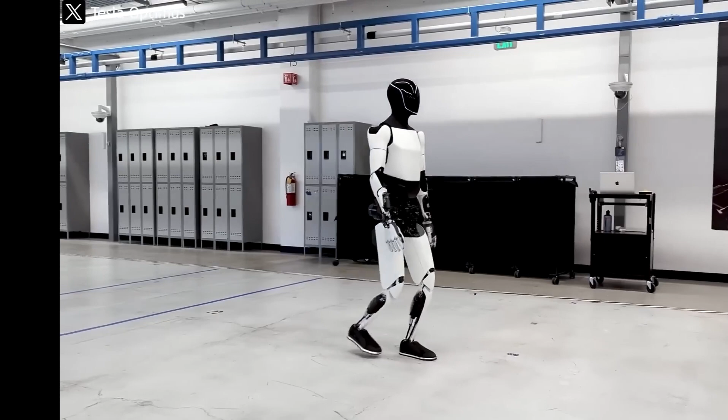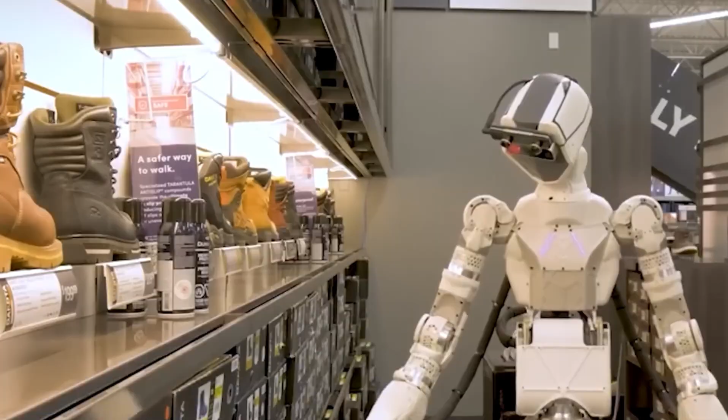This is a super big deal. My prediction is that Optimus will be the biggest product of all time by far. Nothing will even be close. I think it'll be 10 times bigger than the next biggest product ever made.

Your companion, it can be at your house. It can sort of babysit your kids. It could teach them. It'll be a teacher.

When people hear humanoid robot, a lot of us, including yours truly, imagine a bright futuristic world where robots handle all the tough, dangerous, or just plain boring tasks we don't want to deal with. Who hasn't daydreamed about having a robot that cooks, does the dishes, and takes care of chores? Sounds like a dream, right?

But at the same time, plenty of people are freaking out, worrying that these machines will steal human jobs, or worse, take over the world and turn us into their servants, just like in every sci-fi movie we've ever watched.

And then there's the rest of us who think humanoid robots are just clunky, slow, and borderline ridiculous. Basically, a pile of overpriced scrap metal struggling to walk straight. People joke about them walking like Biden or a drunk guy trying to find his way home. Honestly, that's not entirely wrong.

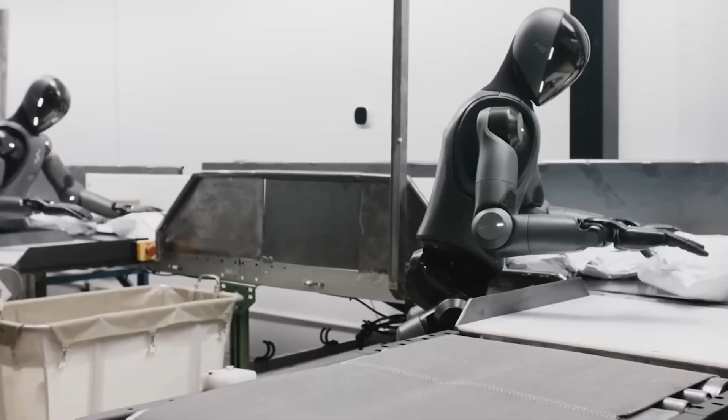Most humanoid robots today still struggle to prove they're actually useful in real life. In fact, some of them look so awkward that it's hard not to be a little skeptical.

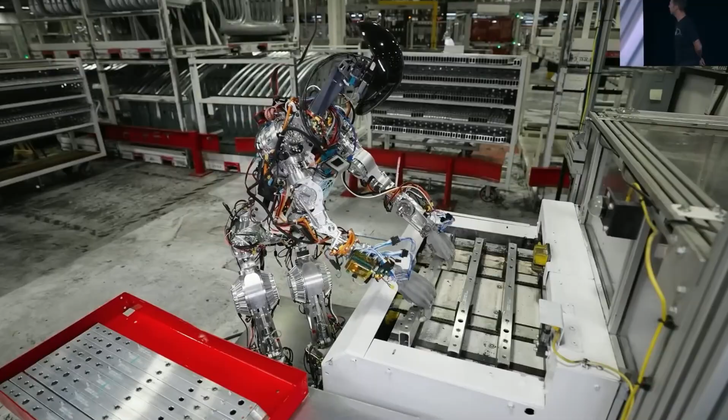But have you noticed something? Over the past 2 years, things have changed big time. More than just small improvements. We're talking next-level advancements. 2 years ago, it was pretty much just Tesla Bot and Boston Dynamics Atlas battling it out. But now, we're convinced this isn't just a two-horse race anymore. It's turned into an all-out tech war with dozens of heavy hitters from North America to China jumping in.

To be fair, we're not here to say that Tesla has the best or most advanced robot out there. But what we do believe is that Tesla Optimus has the most potential when it comes to actually making a difference in people's lives. At the same time, it's also one of the most accessible humanoid robots out there, priced competitively enough to make owning one a real possibility for more people than ever before.

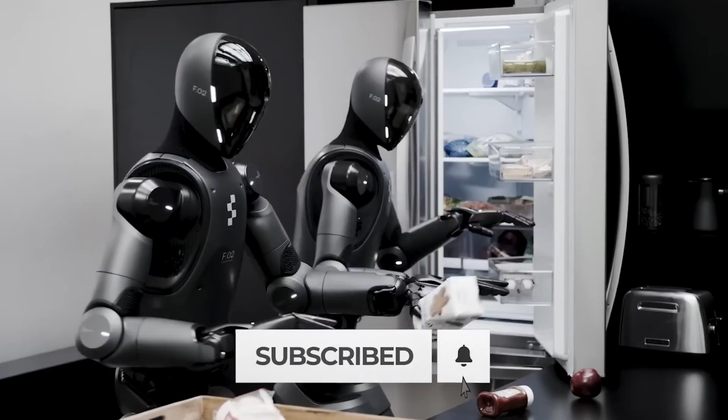You also need to be very good at scale manufacturing. So, in order to have the robot not cost like hundreds of thousands of dollars, in order to make it cost like $20,000 or $30,000, you should be able to buy an Optimus robot for, I think, probably $20,000 to $30,000 long term.

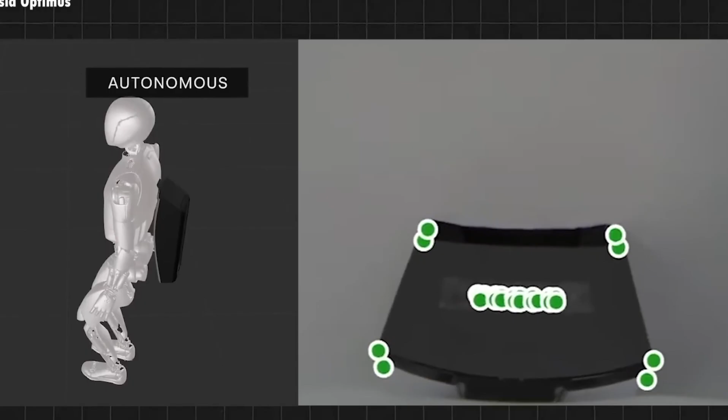Most humanoid robots today still struggle to fit into the real world, mainly because they're not mass-produced. We often see sensational news about a new robot from some company impressing us with amazing tasks and moves. But then after a while, these robots just fade away as if they never existed. This is the common reality of humanoid robotics, and it's why many people believe they're just fancy prototypes in labs that will never make it into real life.

However, Tesla changed the game completely. Not only are they mass-producing humanoid robots, but they also brought 50 Optimus bots to a major event where attendees could actually see and interact with them in person.

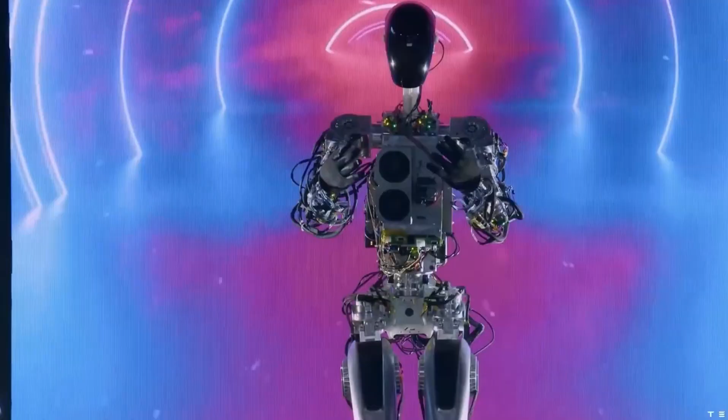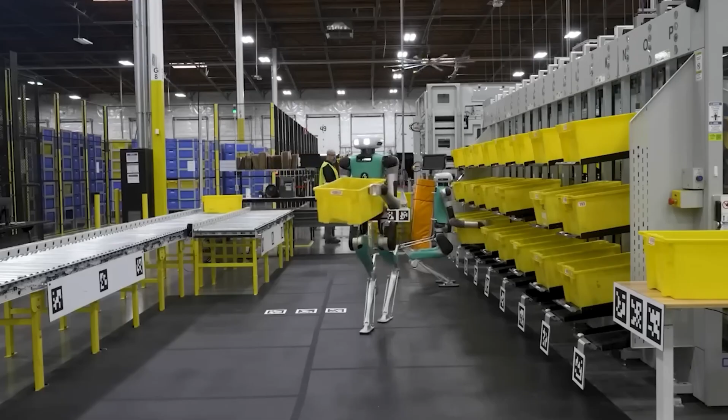The funny part, the event was originally meant to launch Cybercab, Tesla's new fully autonomous robo-taxi. But guess what? The spotlight was stolen by the robots. People gathered around Optimus, not the car, showing that Tesla bot is not just another hype. It's breaking the stereotype that humanoid robots are useless or boring.

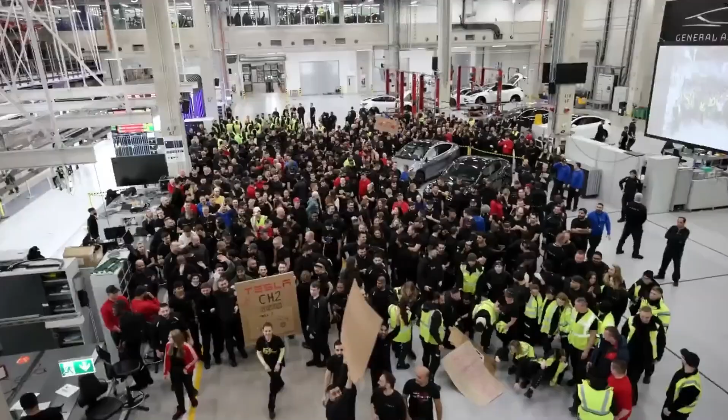And Optimus, it's already proving it can handle a bunch of tasks you'd actually want help with. Yeah, it can receive and inspect packages, serve drinks, fold clothes, charge your EV, clean the kitchen, water your plants, carry heavy stuff, play games with your family, dance, and even answer all your questions.

And here's the kicker. Tesla did all this in less than 2 years. Their progress is so impressive that even Boston Dynamics, one of their biggest competitors, had to give them props. The Tesla team is making great progress, and in 1 year building a couple of machines from scratch, that's remarkable. They're shining a spotlight on the importance of this technology, which we've been arguing for 30 years. So, I think that only helps us.

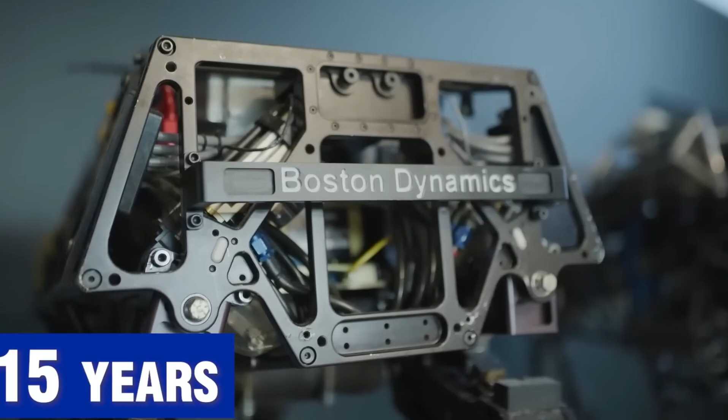What do you think about a robot capable of handling multiple tasks continuously for 8 to 10 hours? And you don't even have to worry about charging it because it can recharge itself. Sounds crazy, right? But that's exactly what the Tesla bot offers. With Tesla's cutting-edge 4680 battery pack combined with an optimally sized battery for a humanoid robot, this is something you won't find in any other humanoid robot in the world.

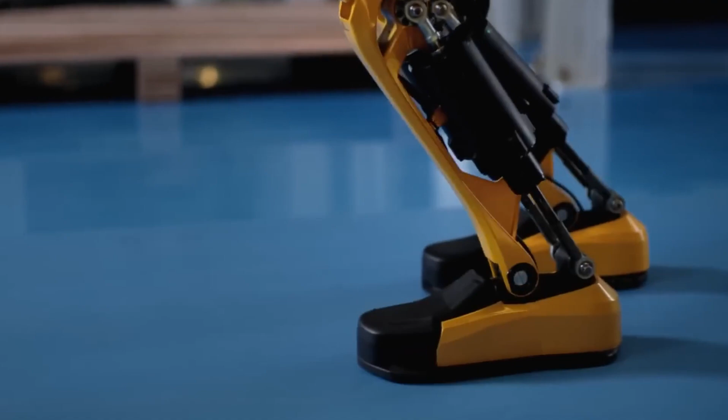This unique feature has garnered significant attention for Optimus and has people eagerly awaiting its release. Imagine putting it to work in a restaurant with 8 to 10 hours of continuous operation. The potential profits could reach tens of thousands of dollars per year compared to your initial investment.

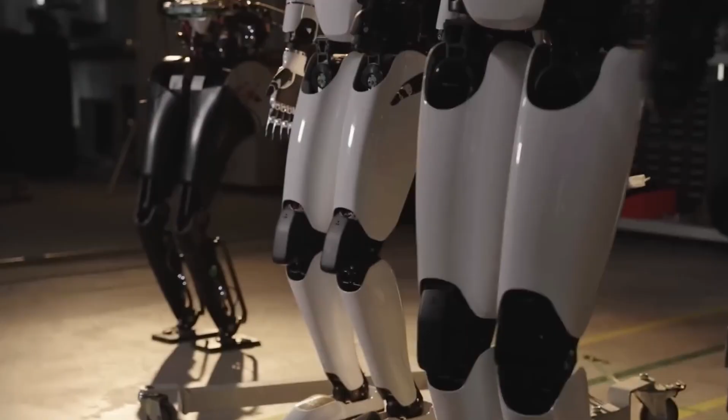You can imagine your own personal robot buddy that is a great friend but also takes care of your house. We'll clean your house. We'll mow the lawn. We'll walk the dog. And we'll teach your kids. We'll babysit. And will also enable the production of goods and services.

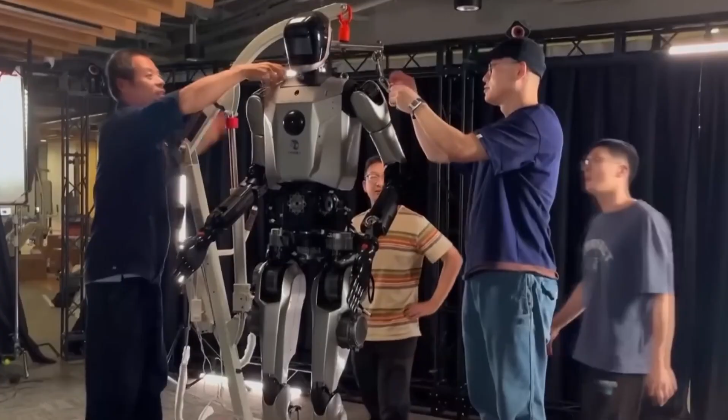In 2022, Tesla first introduced Optimus with a 2.3 kilowatt-hour battery. But at the time the prototype mainly used standard 2170 battery cells, as the 4680 battery technology was not yet available. As a result, Optimus had a rather bulky and rudimentary design.

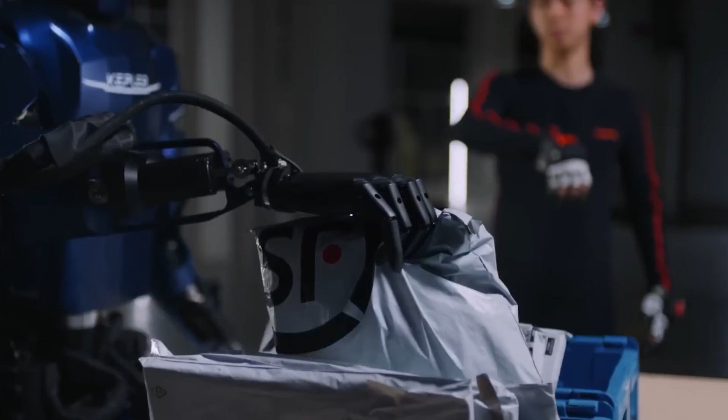However, Tesla has since confirmed that Optimus has been integrated with the company's most advanced 4680 battery technology. Although detailed specifications have not been disclosed, the 4680 battery offers many significant advantages, with a higher energy density that's 5 times greater than the 2170 cells, providing more energy per unit volume while reducing production costs by approximately 14% thanks to improvements in design and manufacturing processes. These benefits have made a major leap in optimizing energy and efficiency.

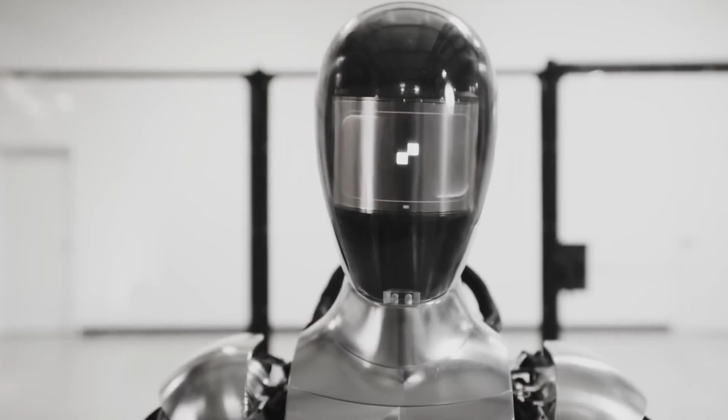When integrating the 4680 battery into the Tesla Bot, Optimus's design became more compact, eliminating the need for a large and bulky battery pack. This not only improved performance but also significantly reduced the robot's weight. For example, the second-generation Optimus shed 22 pounds, dropping from 160 pounds in the first generation to 138 pounds.

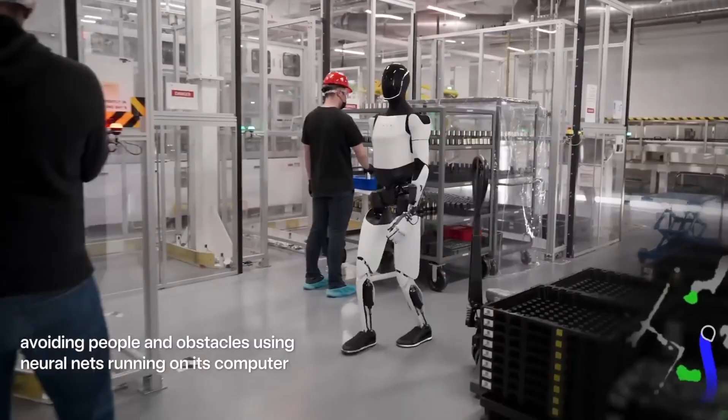Thanks to the superior energy density of the 4680 battery, it not only reduces the size of the battery pack, but also provides enough power for Optimus to operate continuously for 8 to 10 hours. Compared to the first-generation version with a 2.3 kilowatt-hour battery, the second-generation Optimus uses a slightly larger 4680 battery pack, reaching up to 3 kilowatt-hours.

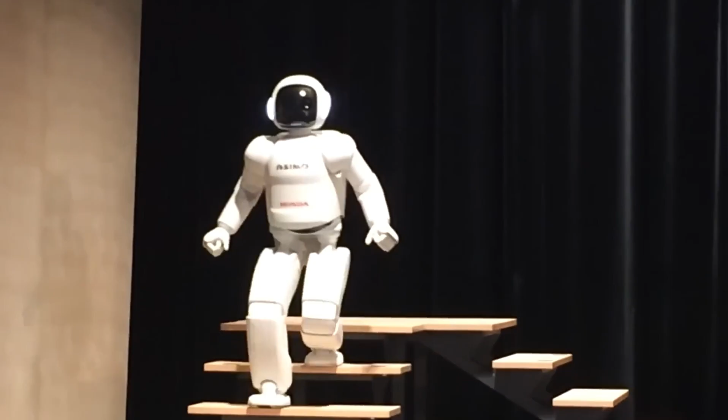What's truly surprising is the recent update about how Optimus charges. Until now, we've all assumed that charging Optimus is like charging an electric vehicle, where you have to plug it in manually. But it turns out it's far smarter than we thought. It's hard to believe that Tesla Optimus can charge itself without the need for user intervention.

Similar to the Cybercab, which automatically returns to a parking area equipped with a wireless charging pad where it charges autonomously, Optimus, as shown in the video, can autonomously locate, navigate, and connect to a wall-mounted charger with an extended connector. This is a charging port that Optimus aligns and connects to by itself. Once the battery is fully charged, it automatically disconnects and resumes its tasks.

If Optimus is charged using wireless charging with a battery pack just under 3 kilowatt-hours, it will charge much faster compared to electric vehicles, which typically take 30 to 40 minutes to fully charge. We believe 10 minutes would be enough to fully recharge Optimus.

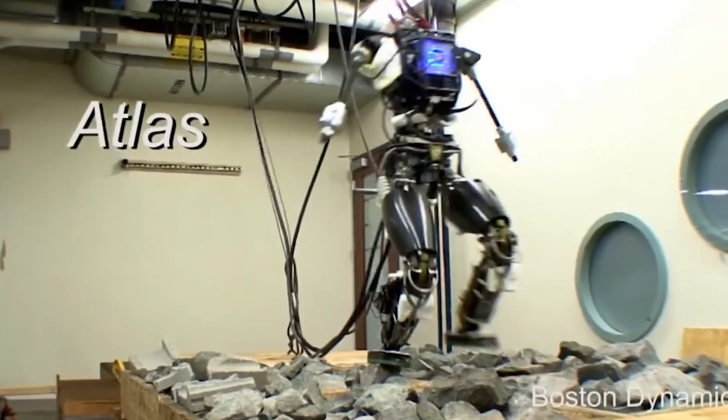This is exactly why no competitor can match Tesla, a fully autonomous robot, for every task.

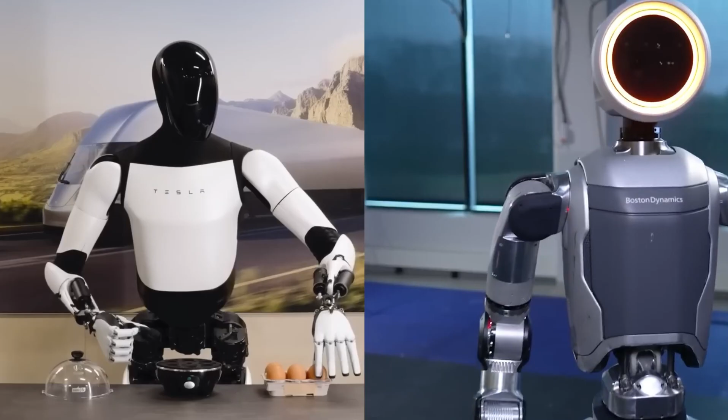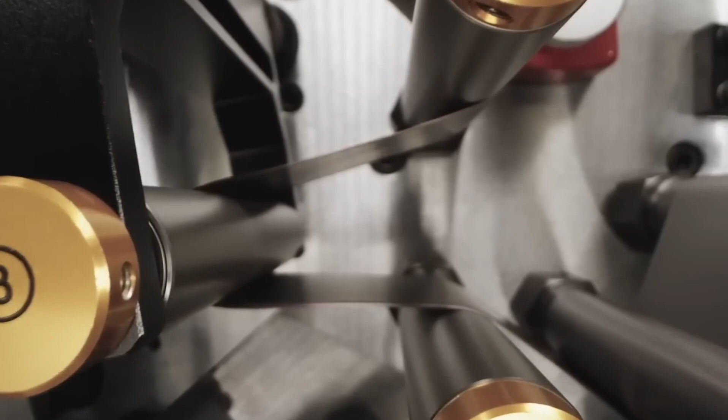Tesla is aiming to make Optimus more accessible to more people at a price of just $20,000. This is a bold but calculated business strategy, thanks to the large scale of production and the in-house manufacturing of Optimus components, including the 4680 battery.

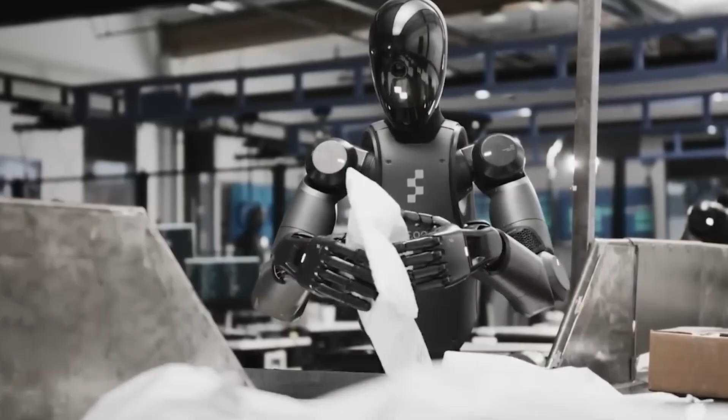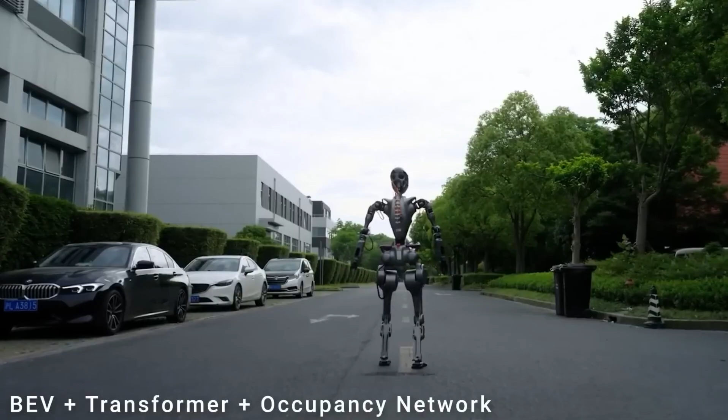Elon Musk has said that Tesla only incurs production costs of around $10,000 per Optimus unit, largely due to the use of components common to Tesla electric vehicles. As a result, the $20,000 price tag is not only feasible, but also reasonable, especially since Tesla is less dependent on outside suppliers. The 4680 battery is a big part of achieving this goal, keeping production costs low while maintaining high performance.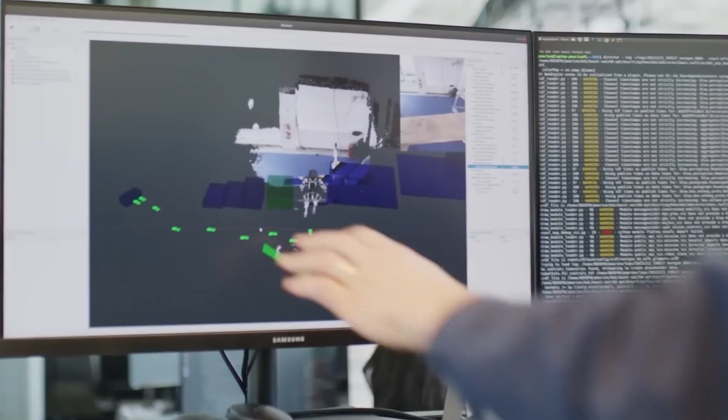In fact, for $20,000, you will be hard-pressed to find a humanoid robot as advanced as the Tesla Bot. This makes Optimus more accessible to a wider range of customers, opening up robot ownership to millions of people around the globe.

It can watch a video of something like a person and then learn just by looking at that video and do that task.

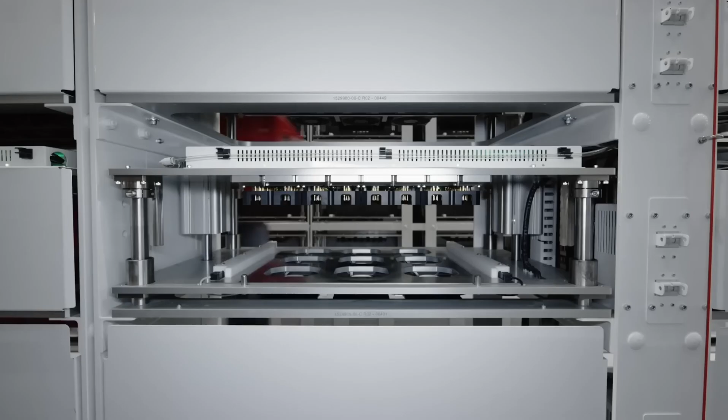Oh my god, we've seriously imagined all sorts of scenarios. If Optimus could actually understand human emotions, just picture this: you point at the fridge and it immediately brings you a beer, or if you rub your stomach, it knows you're hungry. Even crazier, if you act tired, it'll automatically come over and give you a massage. How amazing would that be, right?

Elon Musk emphasized that Optimus is smart enough to perform tasks just by watching a video without needing direct programming. So what if you show it a cooking video, or a piano performance, maybe even a magic trick? Yeah, it could learn from that.

Of course, it might be a bit clumsy at first because it needs to repeat those actions a few times to gather enough data, but this is a perfect example of AI learning, specifically using a deep learning approach. It'll probably have a few bugs, but it's going to be very cool. You'll want to invite your friends over and say, check this out.

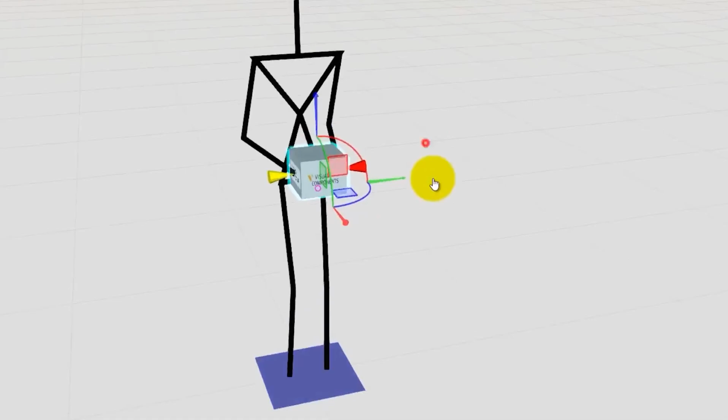Of course, it's going to be tough for a new product like Optimus to be perfect right from the start, especially with a product that requires real-world user experiences. That's why Elon Musk has openly admitted that Optimus will have a few bugs. So what kind of issues could arise?

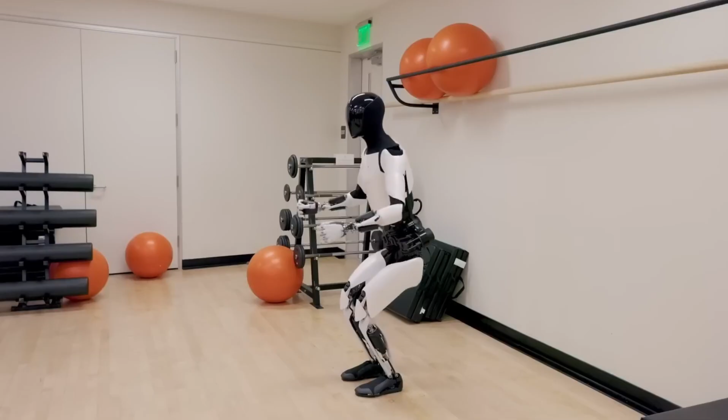One potential problem is misunderstanding commands. The robot might not always recognize natural human speech correctly. Imagine you ask it to grab food and it brings you an empty plate instead. Since Optimus relies on an internet connection, disruptions or connectivity issues are another potential problem.

If the connection fails, the robot might not be able to access its system's data, which could cause it to malfunction. Additionally, stairs could be tricky for Optimus. While it can go up and down stairs, this remains a huge challenge. It requires precise calculation and perfect balance with each step. Otherwise, the robot could trip or fall. So it's definitely a work in progress.

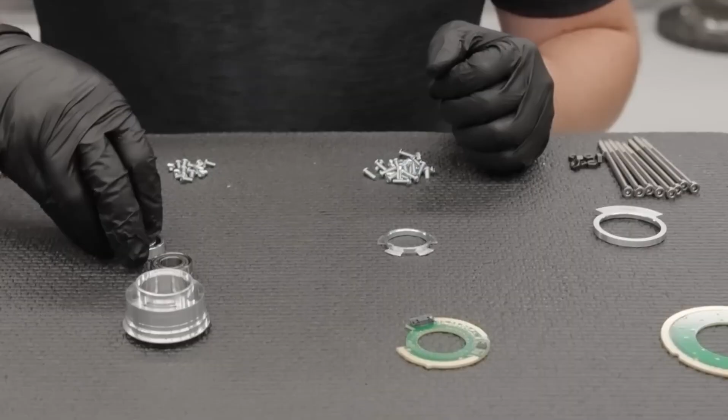All these bugs are expected to improve over time thanks to software updates and ongoing technical enhancements. Elon Musk has emphasized that Optimus will even have the ability to self-correct while it's operating. A perfect example of this is when the Tesla bot dropped a battery cell from its tray. It immediately reorganized everything without human intervention.

So this year we hopefully will be able to make about 5,000 Optimus robots. We're aiming for enough parts to make 10,000, maybe 12,000. But since it's a totally new product with totally new, like everything is totally new, I'll say we're succeeding if we get to half of the 10,000.

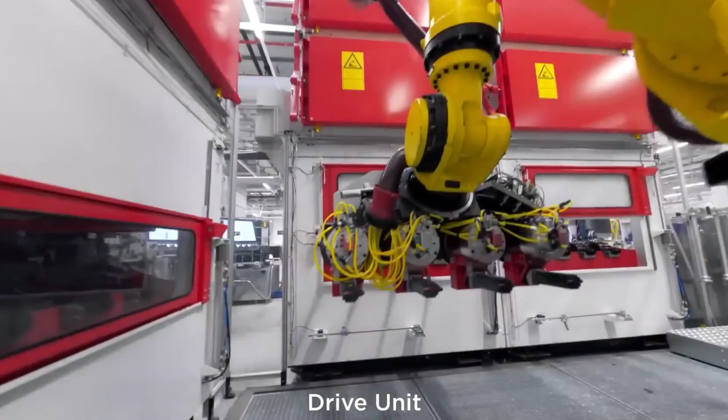Now, but even 5,000 robots, that's the size of a Roman legion, FYI, which is like a little scary thought, like a whole legion of robots. I'd be like, whoa, okay. But I think we will literally build a legion, at least one legion of robots this year. And then probably 10 legions next year. And I don't know, it's kind of a cool unit.

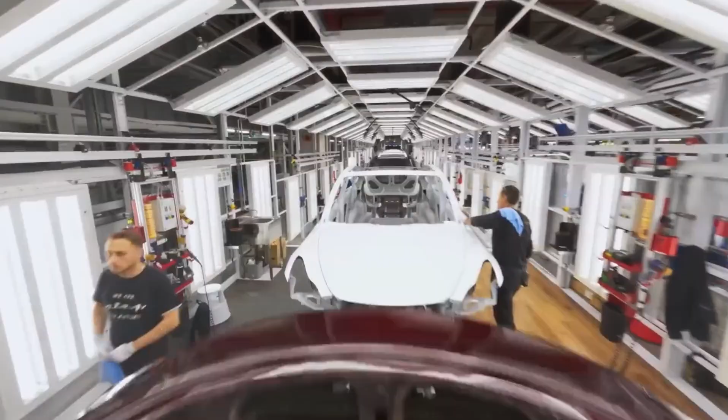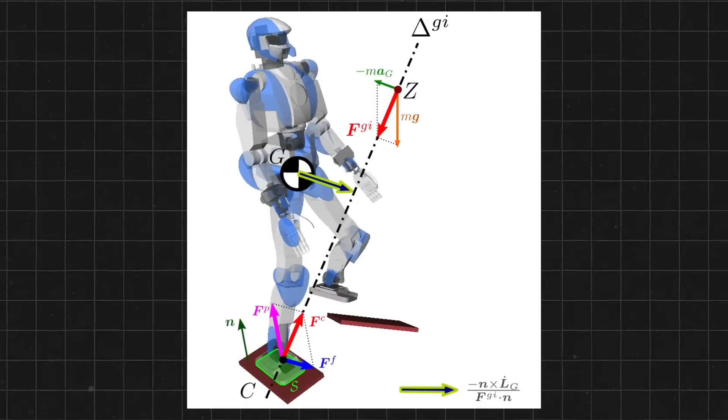We are very excited and confident that this will happen sooner than expected based on Tesla's current pace. Musk mentioned that they are in the process of redesigning Optimus. He admitted on X last year that reworking Optimus' design was one of the most challenging parts of the process, but it was necessary to achieve a design suitable for mass production. From what we know, this new design will belong to the Gen 3, a special version.

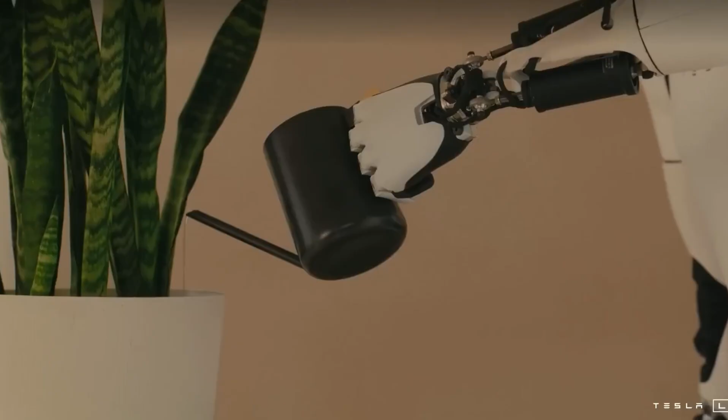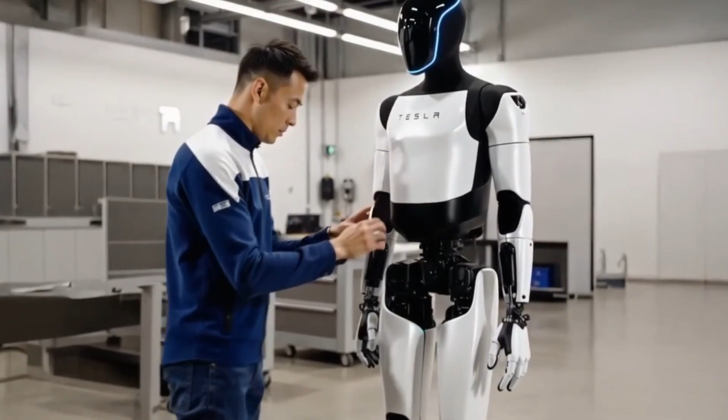As mentioned earlier, around 5,000 to 10,000 Optimus units are expected to be produced this year. The fact is Tesla cannot accelerate the production of Optimus as quickly as electric vehicles in the initial phase because they lack experience with a dedicated production line, a topic we often discuss in episodes about Tesla Bot. Although many parts from electric vehicles are repurposed for Optimus, this doesn't mean that the method of building Optimus will resemble how an electric vehicle is made. They cannot share the same production line or product shape. On a small scale, Optimus is much more challenging to produce than an electric vehicle.

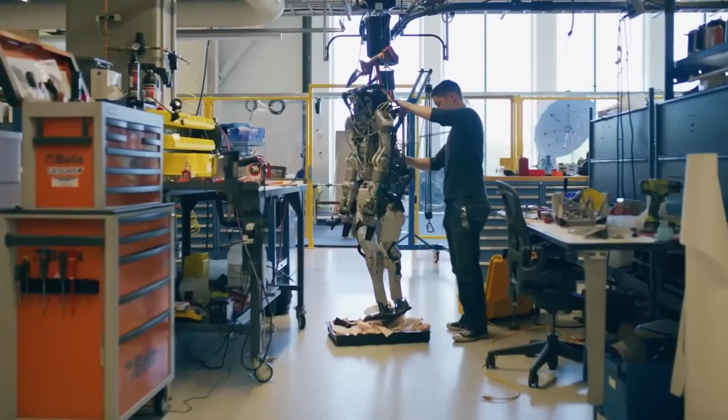Every part must be crafted to resemble the human body's essence as closely as possible. If you try to include too many components, actuators, or a large battery pack, the robot's weight will become too heavy to move. However, if the components inside Optimus are too limited, its performance will be extremely poor. This highlights the many challenges involved in creating a humanoid robot, particularly in the early stages.

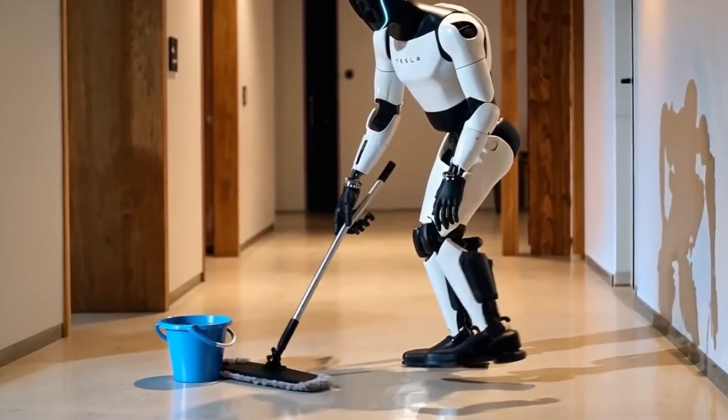Not to mention, you also need to input data into the robot's brain so it can perform useful tasks based on that data. To put it simply, Optimus' brain will be entirely empty at the start. Therefore, Tesla engineers will need to fill it with as much data as possible. Inputting data into a humanoid robot isn't as simple as uploading programming codes into software and expecting Optimus to execute tasks based on those codes.

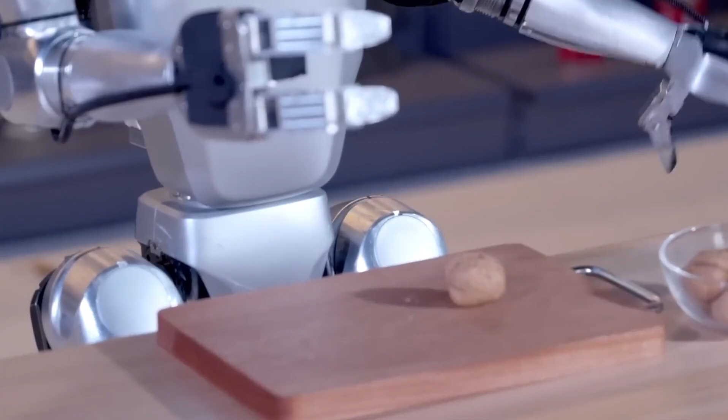This is incorrect. Optimus must be trained by performing tasks under remote control by engineers. During these teleoperated tasks, Tesla bot will collect even the smallest pieces of data from the tasks it performs. These tasks need to be trained repeatedly, not just once, but many times until it has gathered sufficient data for that task.

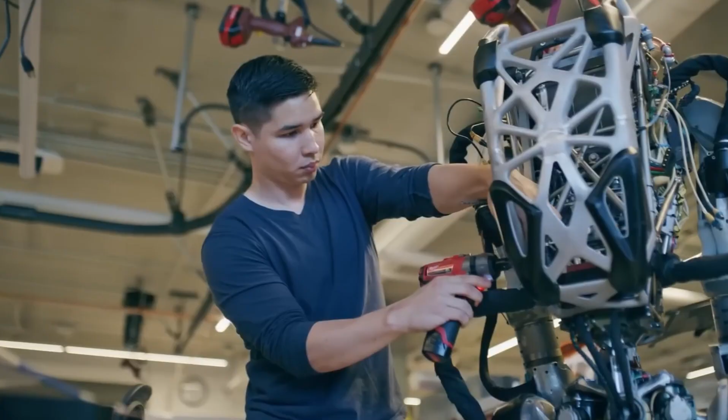For example, it might take a week or more for it to learn how to wash dishes effectively. Initially, it might drop dishes, fail to clean them properly, or make other mistakes. With each failure, it will automatically correct and avoid that error in future attempts, ultimately becoming proficient. This is why throughout last year, teleoperated training for Optimus became common. It simply needed to be fed data through these training sessions.

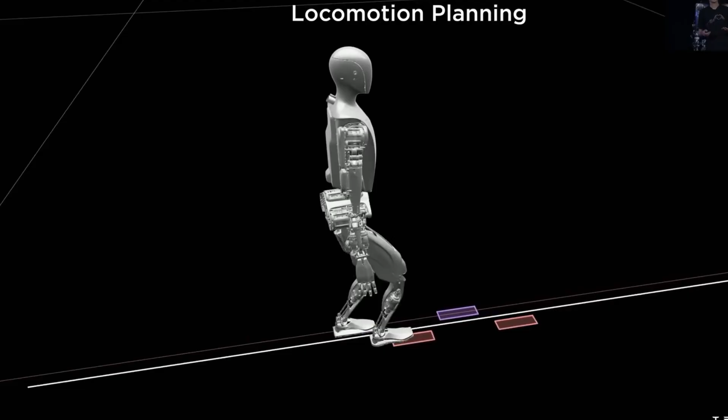Tesla bot Optimus is not just a leap in robotics technology. It symbolizes humanity's aspiration to transcend physical and temporal limitations in order to enhance the quality of life. In a world where humanoid robots were once ridiculed as impractical, useless, or confined to laboratories, Tesla has completely changed the game. Optimus is no longer a distant concept. It is steadily becoming a powerful assistant in real life, taking on boring, strenuous, or dangerous tasks for humans.

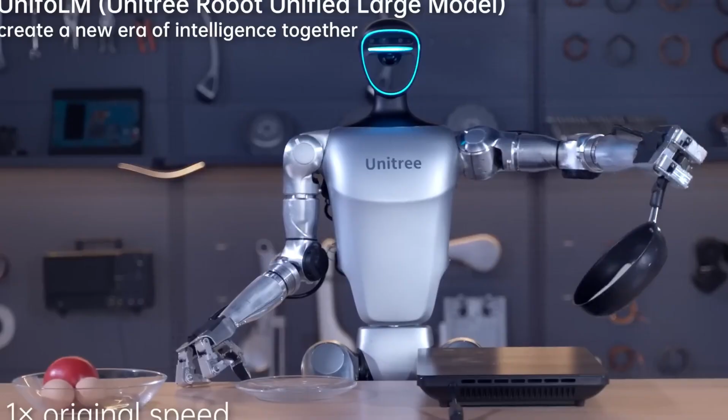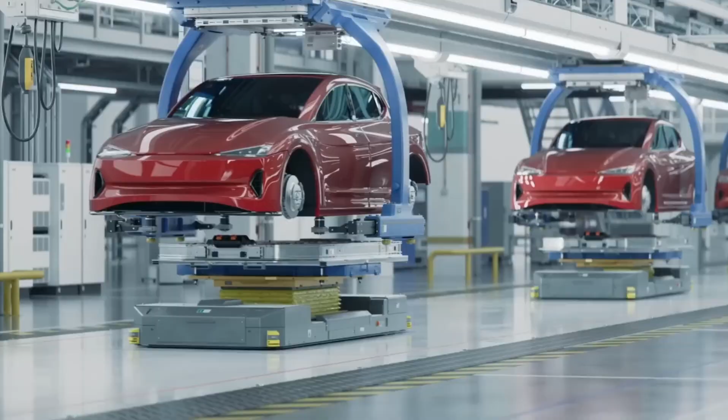The greatest significance of Optimus lies not in its cutting-edge technology or its ability to operate for 10 hours after just 10 minutes of charging, but in its accessibility. Priced at $20,000, this robot can learn from videos, serve drinks, clean homes, babysit, and even assist in manufacturing. This opens the door for millions of people to own a personal robot, something that once belonged only in science fiction. Optimus also represents a cultural and societal turning point.

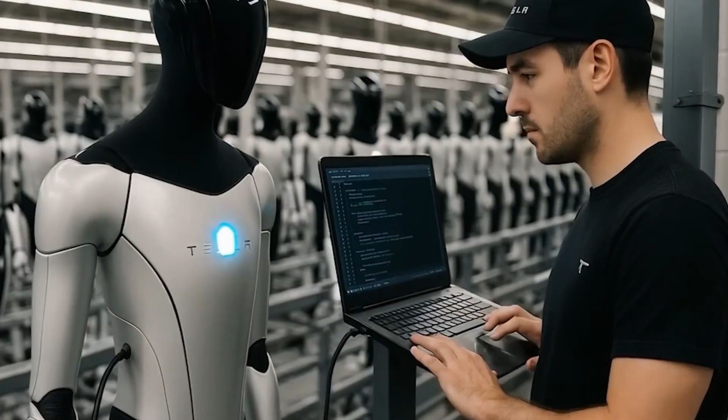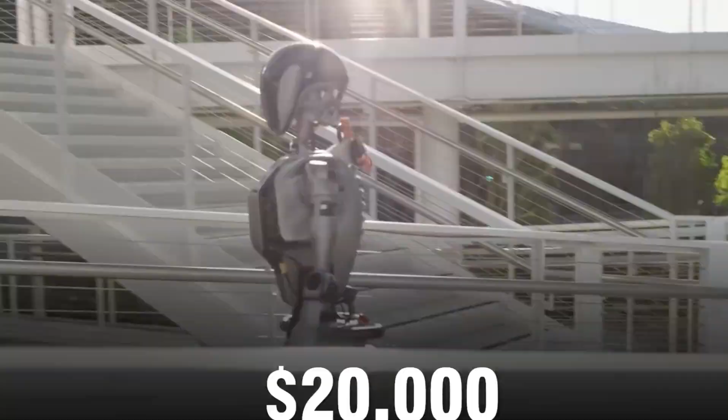It doesn't just replace manual labor. It challenges our definitions of work, efficiency, and the future of human-machine relationships. In the near future, each person might have a robot companion that is intelligent, dedicated, and tireless, allowing humans to focus more on creativity, emotion, and meaningful connections. In that sense, Tesla is not merely building a robot. They are helping rewrite the way we live.